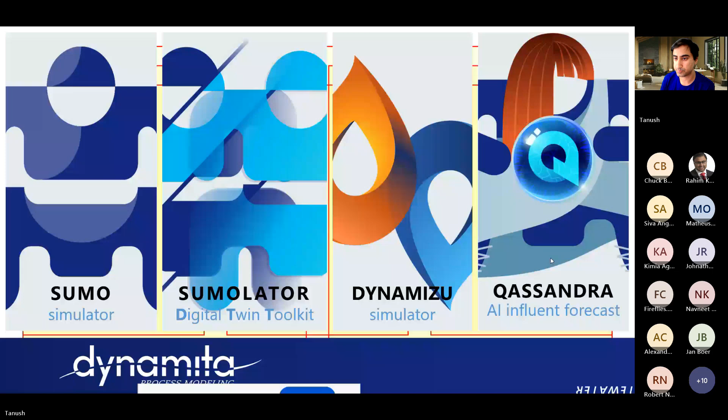Then there is anaerobic digestion, which can be simulated. You can do gas emission calculations and energy calculations from combined heat and power units. We also have precipitation, so you can focus on resource recovery as well. So Sumo is a comprehensive software which allows you to simulate different process applications, different operational strategies for your plants, and identify how your technology fits into this plant.

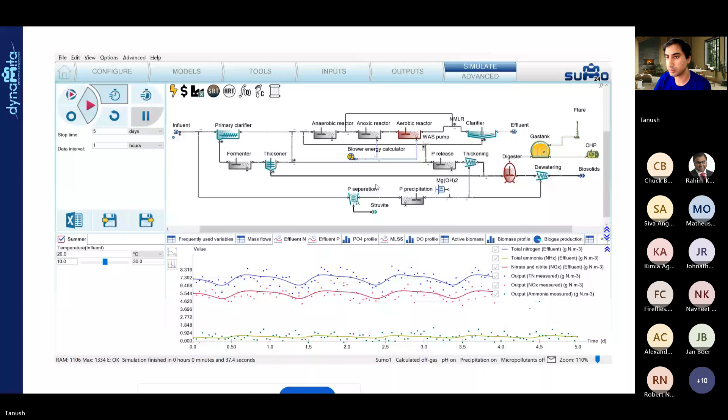Dynamizu, on the other hand, focuses on, like I said, reuse application. So it's more focusing on using membrane technology such as ultrafiltration membrane. It uses reverse osmosis. It has units such as decarbonator and ultraviolet AOP, advanced oxidation processes, to be able to simulate the water treatment side of the business.

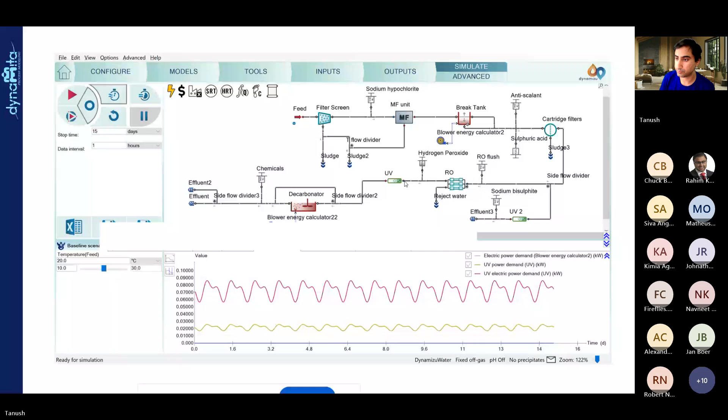Now, coming to Sumolator, what is Sumolator? A Sumolator allows you to connect your utility, the data you've been collecting in the SCADA system, to a live model, which is running in Sumo. So essentially, you'll prepare a configuration of your plant in Sumo, and then you can connect it to the data of your facility.

The first step which comes into play is called monitoring twin. So you try to represent the real live operation of your facility in a digital model. And that's what a monitoring twin is. The monitoring twin is working side by side the plant and receiving data from the plant and sending feedback to the plant in terms of what kind of operational information you might want to gather from the model itself.

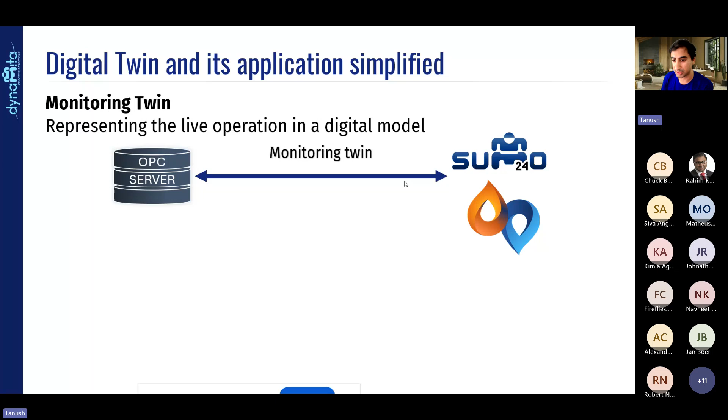The second part of the digital twin application is optimization. So you can use the monitoring twin which you have created, which is working side by side your facility, and then you can optimize to identify best operational condition. And that requires not only knowing what your plant is doing right now, but also feeding in information using an AI influent predictor so that you can identify operational set points into the future.

And that information then can be sent back to the monitoring twin, which can be relayed back to the SCADA system, and then the operators can decide if they want to include those operational changes into their operation or not.

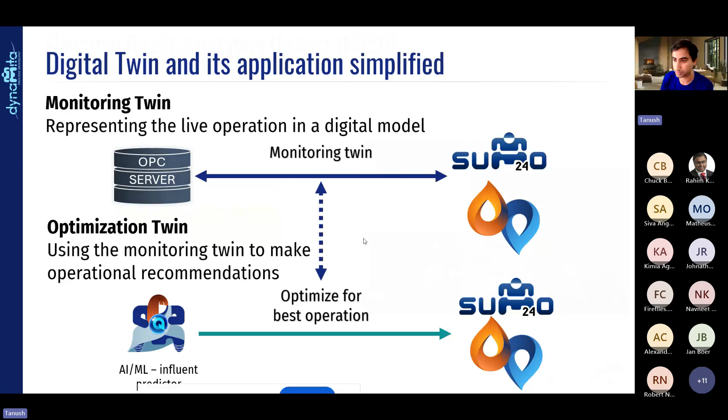So one of the case studies we've been working on is the Hampton Roads Sanitation District in Virginia Beach. The facility is Nansemond, a wastewater treatment plant with over 900,000 cubic meter per day of raw wastewater to be treated in their 5-stage BNR process. And one of the goals is to use digital twin and use the model to identify the DO set points which result in a tighter ammonia control around their set point.

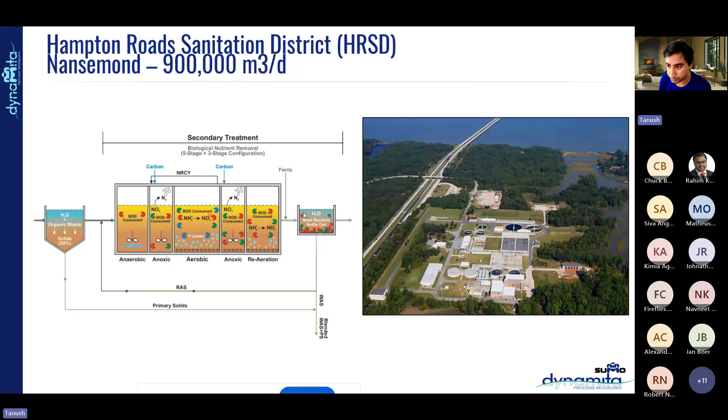So what we have done for HRSD is we have connected a digital model to their SCADA system. So from their SCADA system, the data gets cleaned and sent through a Python script or a digital control script into their process configuration in Sumo. This file is running in real time, meaning that the data is coming in very frequently. So every couple of minutes or every 5 minutes, however anybody wants to set it up.

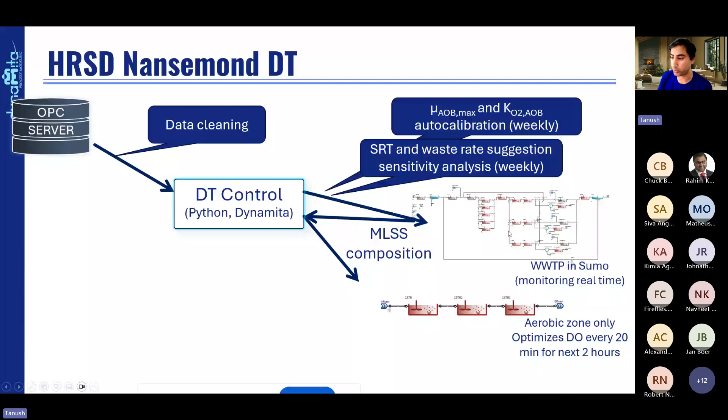The model file is auto-calibrated every week. We do sensitivity analysis on a weekly basis to identify the correct SRT and waste rate. Now, this acts as a monitoring twin. On top of the monitoring twin, we get the mixed liquor composition from the monitoring twin and send it to a smaller file where we identify what the DO set point should be so that the plant can operate at the ammonia set point they desire.

So the mixed liquor composition is then sent through the Python script into a smaller Sumo file, which also receives the ammonia load information from the future, meaning that the predictor is predicting what the ammonia concentration or the ammonia load to the plant will be every 20 minutes, 2 hours into the future. And that information is relayed into a Sumo file where the optimization is done. And the DO set points, which are identified, are sent back to the SCADA system.

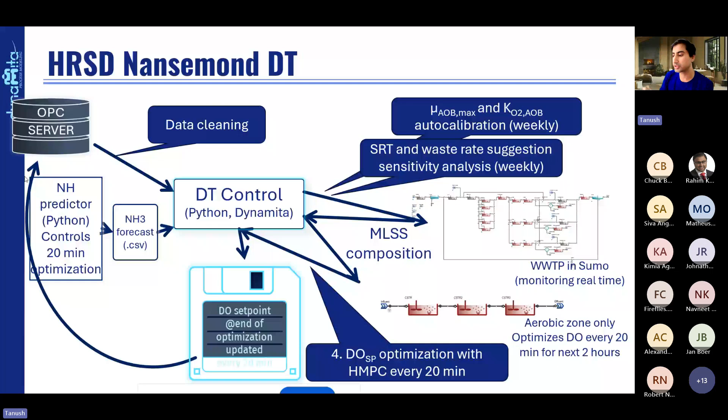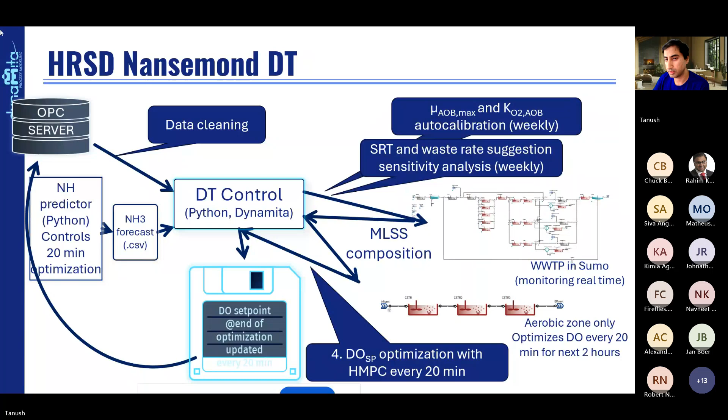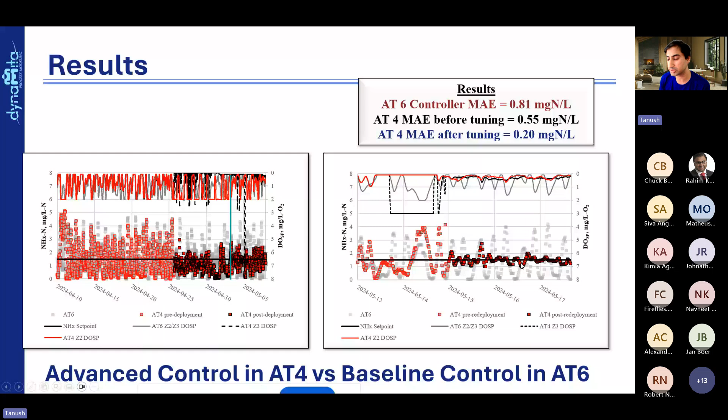Okay. At this point, what I'll do is I'll actually go over to Sumo and show you the interface and talk through how we can build a plant together. So I'm going to go over to Sumo and I'm going to pick one of the examples. So in the home page, you can see that on the left-hand side, there is documentation which you can view. And on the right-hand bottom side, we have a bunch of different examples we can choose from. And today I'm going to choose the MLE example.

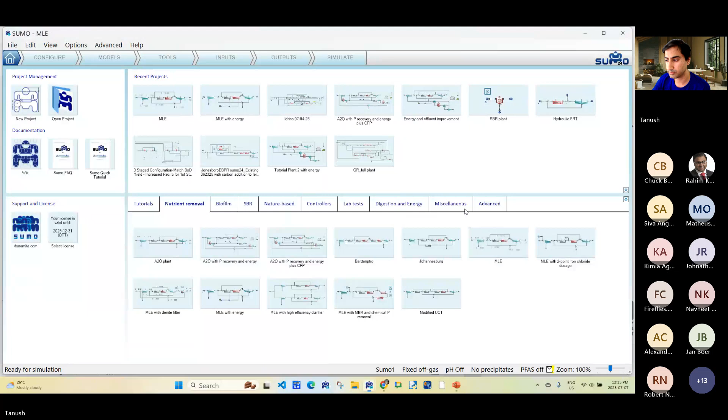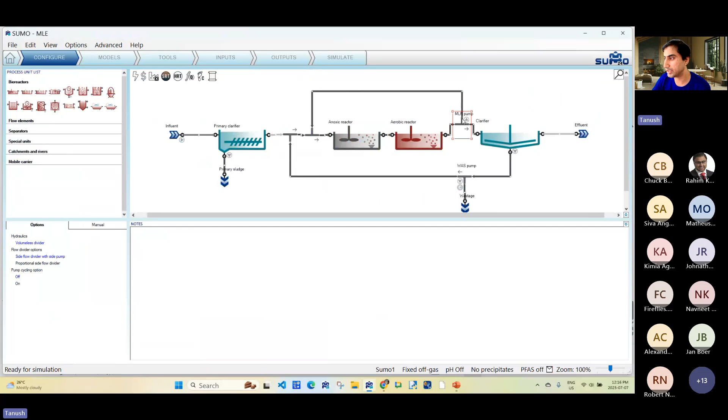So once you open this example, it will take you to the configure page. In the configure page, this is where you'll actually put your plant together. So in this case, we have raw influent going into the primary clarifier, followed by an anoxic tank, and then an aerobic tank with internal recycle represented by this side flow divider. Then the sludge flows into a secondary clarifier.

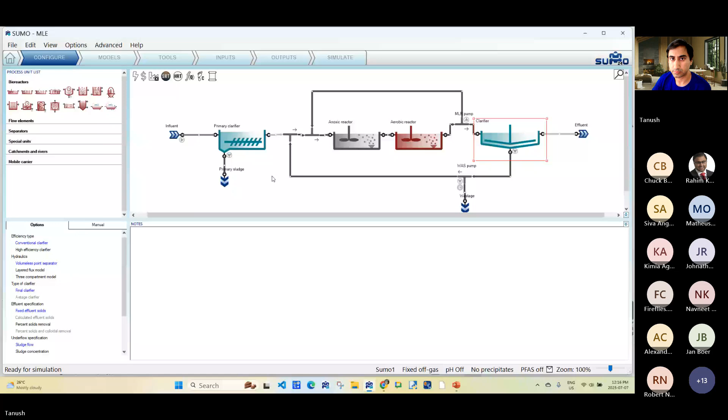The underflow of the secondary clarifier goes back to the head of the anoxic reactor before it's wasted. And this allows us to control the sludge retention time. Okay, so this is a simple configuration for total nitrogen removal for a BNR process. When we go to the model tab, in this tab, we are able to select different

types of model options. So we have a one-step nitrification/denitrification full plant model, and a two-step nitrification/denitrification full plant model. And the difference between the two is, in the one step, we have ammonia biologically converted to nitrate, while in two step, we have ammonia going to nitrite, and then nitrite goes to nitrate.

And the advantage of using two-step is whenever you're doing deammonification in side stream, or if you're looking at shortcut nitrogen, or if you're doing PdNA, partial denitrification with anammox, that is the model you can select to do BNR treatment. We also have models which focus on sulfur biology and chemistry. We also have a model which is dedicated to greenhouse gas emissions. So you can select these different model options and identify what's the best option for you.

We can look at gas transfer calculations, the off-gas emissions, the composition of the off-gas. You can use pH in your calculation. You can calculate pH and predict the impact of pH on your nitrification process. You can look at precipitation, such as struvite or vivianite formation in your digesters if you add iron.

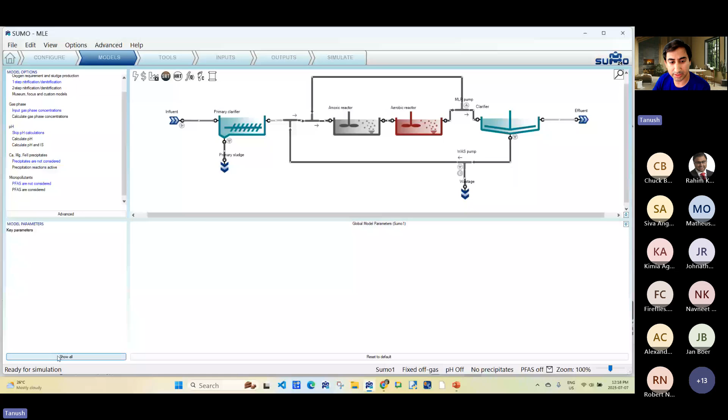In the same tab, you can look at some of the kinetic parameters or stoichiometric parameters, which are right there, here at the bottom. And in order for you to calibrate your plant, you can look to these kinetic parameters or stoichiometric parameters and decide which one works best under which scenario. Although all of these parameters have been identified over years of research, years of experience working with many different utilities, and hundreds of years of experience we have in activated sludge systems.

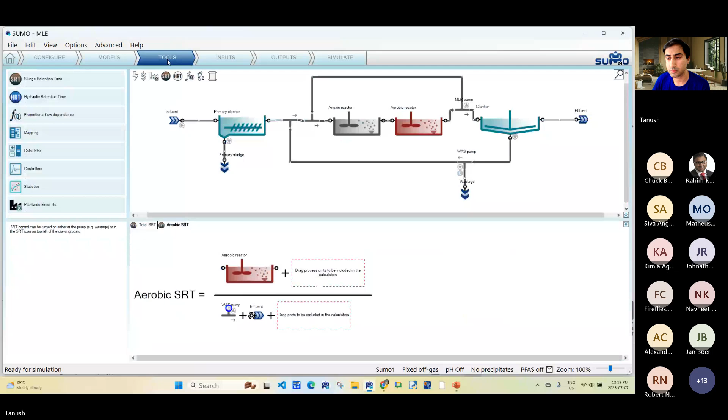When I go over to the tool tab, in the tool tab, you're able to calculate the sludge retention time. So you can create a calculation where you can drag and drop units from your configuration and simply create a calculation you require. So in this case, we are looking at sludge retention time. And in sludge retention time, we are calculating the mass of solids which are sitting in these two tanks divided by mass of solids which are leaving in the waste stream and in the effluent of this plant.

You can similarly calculate the hydraulic retention time. You can do proportional flow dependency. So for instance, the RAS flow is sometimes said to be proportional to the influent, and that can be done using this feature. We also have controllers which are part of the configuration, also part of the package. So you can look at continuous P controller, deadband controller, PID controller, and so on.

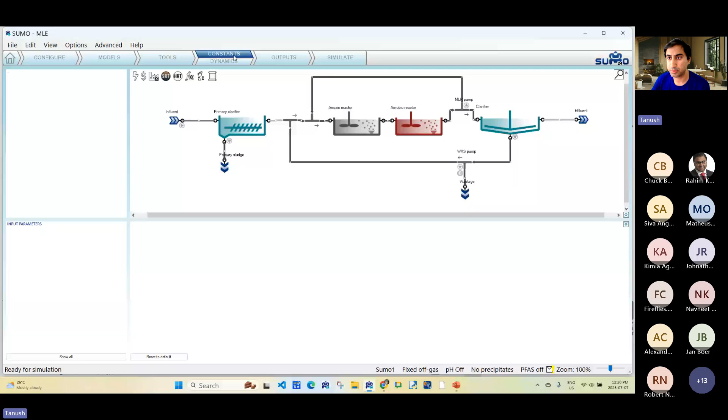If I go to the input tab, in the input tab, you can define constant values if you click on the influent, such as the flow rate, COD concentration, TKN for the influent. If you switch over to your primary clarifier, you can provide information which is necessary for you to simulate regarding a primary clarifier, and so on for your CSTRs, for example, for your tanks, and then secondary clarifier.

The SRT calculation, which is part of the tools which we created: if you click on this button on the drawing board, you can actually provide an input SRT and the model can calculate what the wastage should be. So the model can allow you to maintain the SRT by identifying the correct sludge retention time.

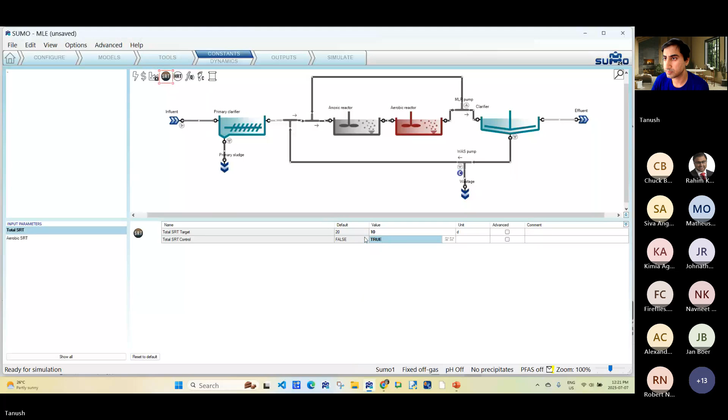And you can do this by simply turning on the wastage SRT controller by turning it to true and providing a value which you would like this plant to operate at. So let's say if we want to operate at 10 days of sludge retention time, we would simply enter 10. And now we can go to the output and see what the results would be.

So in the output tab, we are able to create these different tables, time charts, XY charts, to look at many different concentrations and composition of your wastewater. And you can simply do this by dragging and dropping any of the parameters. So if I wanted to recreate this table, all I have to do is click on table, click on influent, and drag the frequently used variable to the right. And you can see that it populates itself with different composition of wastewater in the influent.

Now you can drag any of the process units. So you can drag your anoxic tank, and the information is populated, which is, of course, pertaining to that anoxic tank. Then you can do aerobic tank, and then you can drag and drop your effluent as well. Okay. You can similarly create a time chart where, in this case, we are looking at the effluent total nitrogen, ammonia, and nitrate and nitrite.

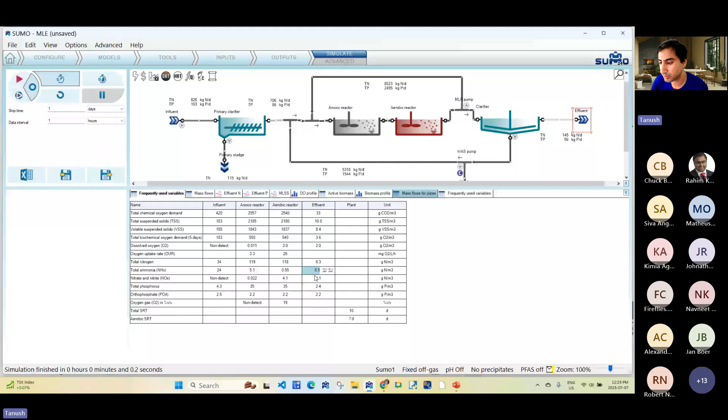Let's go to the simulate tab. In the simulate tab, you have the option of doing a steady state calculation, or you can do a dynamic simulation. So if you do a steady state calculation, which is this button, the simulation is done almost instantly. You can see these blips, and these results tell you what the steady state values are for your plant's performance. We can go to the table which we have created and look at, let's say, the ammonia concentration. So the ammonia concentration in the effluent of this plant at steady state is 0.5 milligram nitrogen per liter.

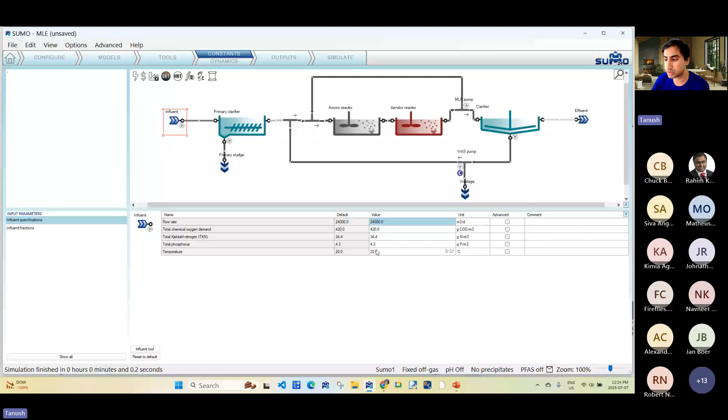Right. Now, what if we wanted to evaluate two different conditions? If we wanted to see what happens if the plant configuration and the operation remains the same and the temperature of the influent is lower. So to simulate the winter condition, if we go to the input, we can click on the influent, and we can either change the value of the temperature in the influent from, let's say, 20 degrees to 10 degrees right here, or we can select it as an advanced parameter.

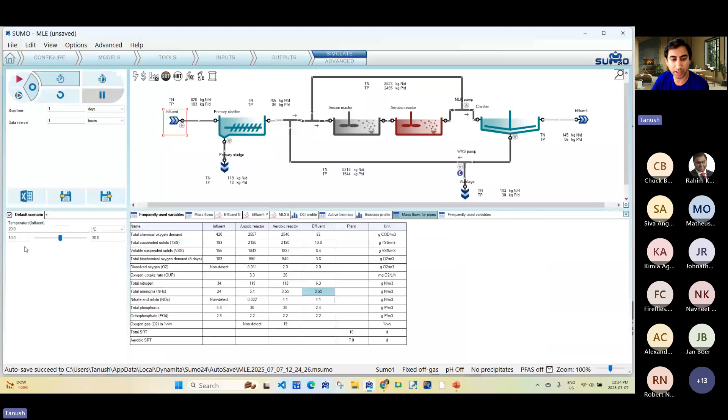And once you select it as an advanced parameter, you no longer can change that temperature value from this input tab, but you can go to the simulate tab, and you can see that this value appears right here. And now you can change the value. So you can double click here and change the name of the scenario to winter, and change this to, let's say, 10 degrees Celsius, and perform another steady state. And now you can see that the ammonia concentration is 3.8 milligram nitrogen per liter.

Okay, what if you wanted to do more than one scenario evaluation? You can click on this plus button and then create another scenario. So in this case, because the default temperature is 20 degrees, let me call it annual average. And I would add another scenario, which I would call summer. And I will make this 25 degrees Celsius.

Okay, so I can uncheck the winter and check the annual average, or I can uncheck the annual average and check the summer and redo the simulation, or I can actually select all three scenarios and perform a steady state calculation. So if I press steady state, after I've checked all three, Sumo will actually do simulations for all three scenarios and allow you to see them from one graphical user interface.

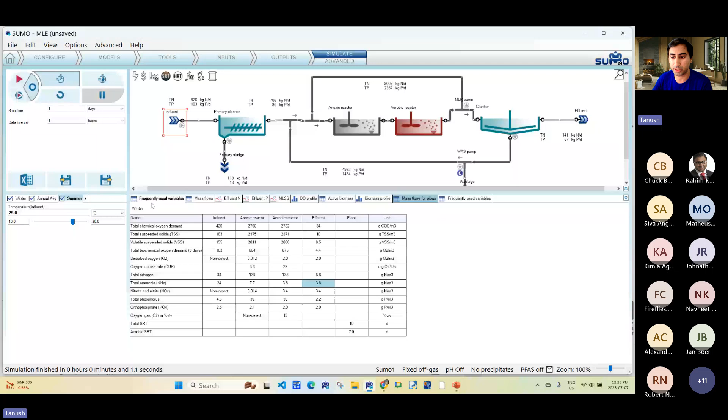If I go over to the time chart and look at the effluent nitrogen, of course, we did steady state calculations. So that means there is no relation to time in this case, and that's why you see these blips. Okay, what if I do a 1-day dynamic simulation and I combine the steady state with the dynamic simulation? So I press steady state and dynamic.

And now you can see results from all the 3 simulations which we have set up on one single time chart. And this allows you to understand the impact of the operational changes, of the variability in your influent on the performance of your plant. And we can narrow down to look at just the ammonia. Of course, you can highlight with your mouse and see, okay, this is the winter condition, this is the annual average, and that's the summer condition. Okay. Now, this is one way for you to identify or understand the impact of the temperature.

Now, one of the common things we like to do when we are looking at designing a plant is to identify what the minimum SRT of this process is. And the minimum SRT is the lowest SRT at which you achieve your desired effluent quality for ammonia target, meeting your ammonia target at the lowest temperature. So there is another feature in Sumo where we can evaluate not just 3, but a range of values and plot those values on an XY chart and look at how the ammonia concentration is changing as the SRT changes.

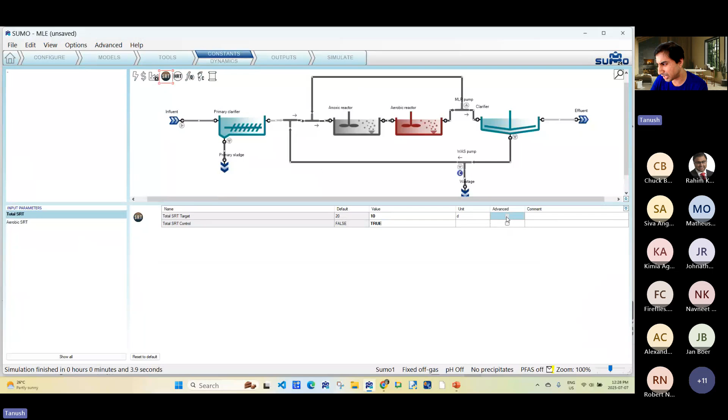Okay, so for this second simulation, what I'm going to do is I'm going to go back to the input. I'm going to click on the sludge retention time, and I'm going to select this SRT as a parameter which I will modify. When I come back to the simulate, you can see that the SRT shows up in the advanced window. I make this change by going from simulate to advanced, and then I can choose the winter scenario. So in winter scenario, it's 8 degrees Celsius. That's the lowest temperature for this plant. I would select the sludge retention time as a parameter which I want to evaluate.

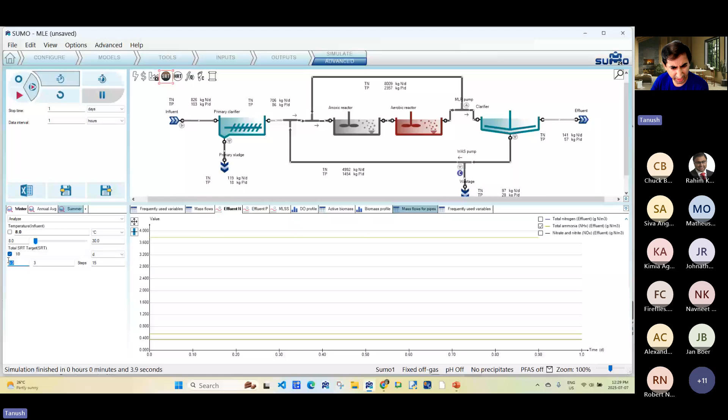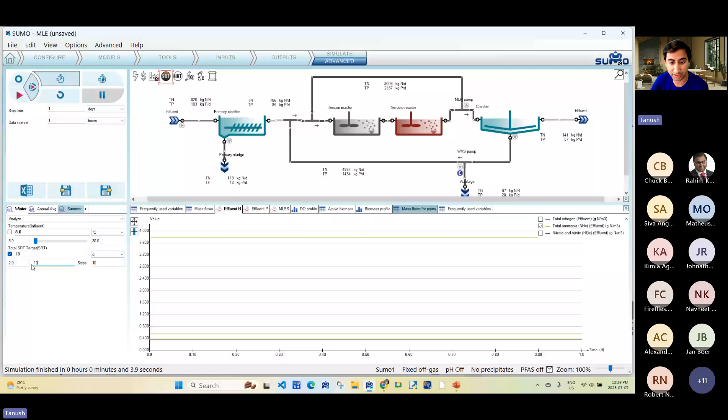And I would change the SRT from 2 days to, let's say, 10 days. So that's my minimum SRT, that's my maximum SRT, and I want to do 10 simulations between them. Okay, so from 2 to 10, the first simulation will be at 2 days of SRT, the last simulation will be at 10 days of SRT. And I'm doing 10 simulations between them. And if I do a steady state, this time chart will automatically convert into an XY chart, and you would see the impact of your SRT on the effluent ammonia. So you can see that at 8 degrees Celsius, even if we increase the SRT to 10 days, at 10-day SRT, you reach 3.8 milligram nitrogen per liter of ammonia.

Okay, we can extend this from 10 days to 15 and still do 10 or more simulations if we wanted to, and redo this. And Sumo is doing 10 simulations. And now you can see that if you want to achieve a minimum SRT, or if you want to achieve a target ammonia in your effluent, let's say, of less than 2 milligram nitrogen per liter, then you must maintain the SRT for this plant at 8 degrees Celsius at 14 days of SRT. So that's the minimum SRT at which you can achieve your 2 milligram nitrogen per liter or less ammonia target in your effluent. So these two are simple ways of using simulators to do an evaluation of your facility, identify operational set points.

Now, you can use this and convert it into a digital twin model, which is connected to the plant, where the influent is receiving from the SCADA the actual flow rate, the actual COD, the actual TKN they measure, the actual temperature they're measuring in the plant, and the model is being used to identify what is the SRT they should be operating at so that they can meet that effluent ammonia target.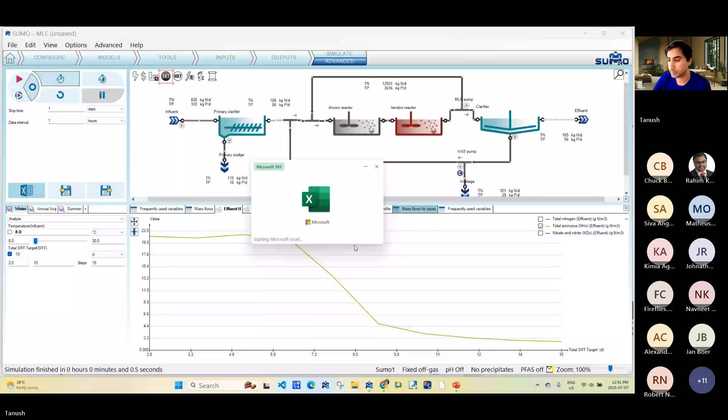And once you're done with this evaluation, you can actually create a report. So if I create this report by clicking on this button right here, it will allow me to save and open an Excel file. I'll say, yes, I want to open it. And in this Excel file, you'll get all the information. So you have information regarding the plant configuration.

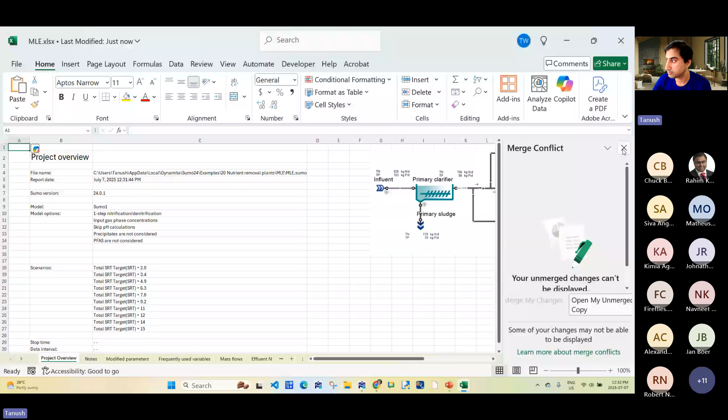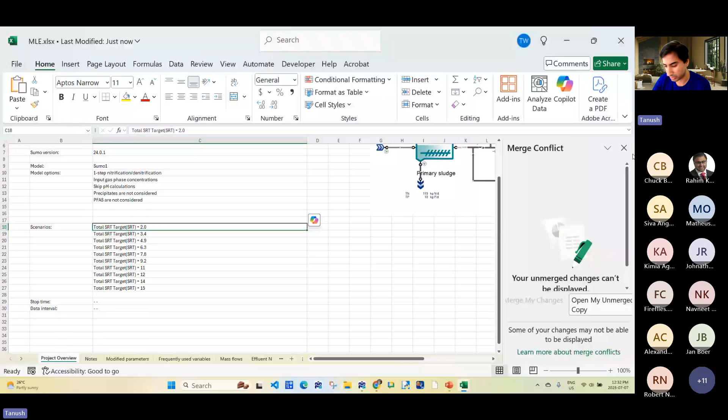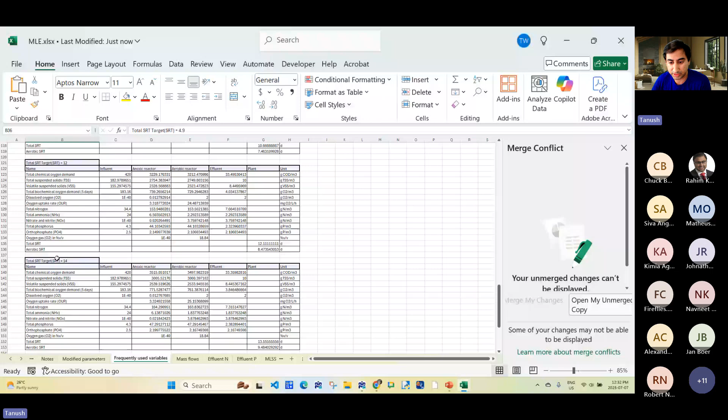You have information regarding what was the SRT, the number of simulations which were performed. And then you can also get the final values for each of the simulations. You can get all the information which you have set up in your Sumo, and all of those simulations will show up. So for example, this is at 4.9 days of SRT. And if you scroll down, this will be at 14 days of SRT. And then you can create your own graph if you wanted to understand the performance.

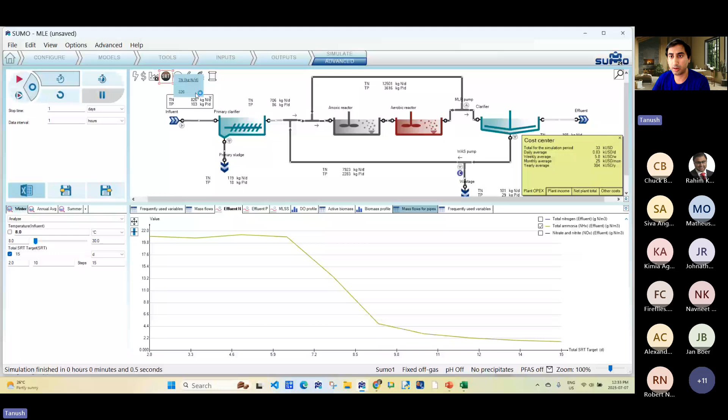All right, so those are the key aspects of Sumo which I would like you guys to know. But apart from that, we have a model which can do energy calculation, cost calculation, carbon footprint calculations as well, scope 1, scope 2. You can optimize, you can use it for design. So you can ask Sumo to tell you what the reactor size should be to meet a particular criteria. You can identify different operational set points or optimize for operational set points and so on.